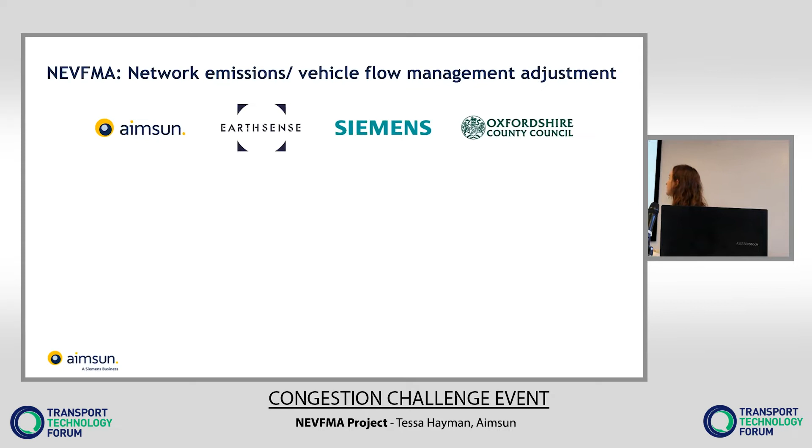So what does NEVFMA stand for? It stands for Network Emissions Vehicle Flow Management Adjustment. The project was building a real-time model of Oxfordshire County, which then combined with EarthSense's Zephyr model and gives real-time air quality data from our traffic model. We then use that air quality data as well as our traffic outputs on congestion to identify where there might be problems and then come up with some solutions in real time which can be tested.

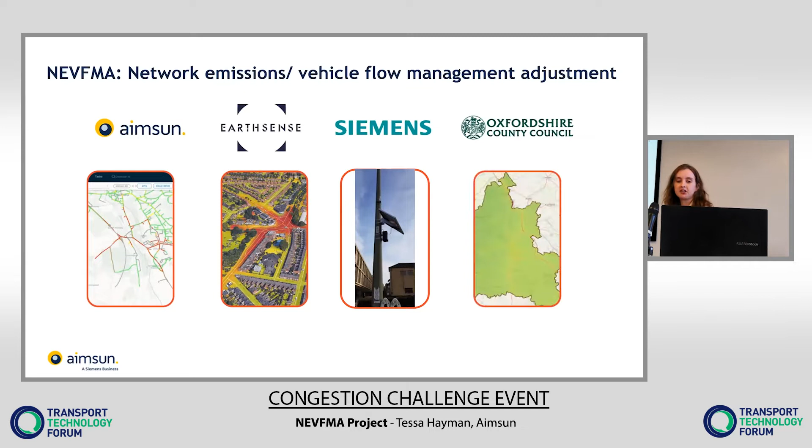We also had Siemens on the project. They were doing some stuff with AI and signals, but we're not going to talk about that in this presentation. And we also had Oxfordshire.

Our objective in doing this was to try and mitigate the air quality problems across Oxfordshire from the road transport. And what we wanted to do was see if a real-time model could both improve congestion and maybe the air quality problems around that. And in doing that, we wanted to look at using existing council infrastructure to build this and try and aim to reduce the tailpipe emissions.

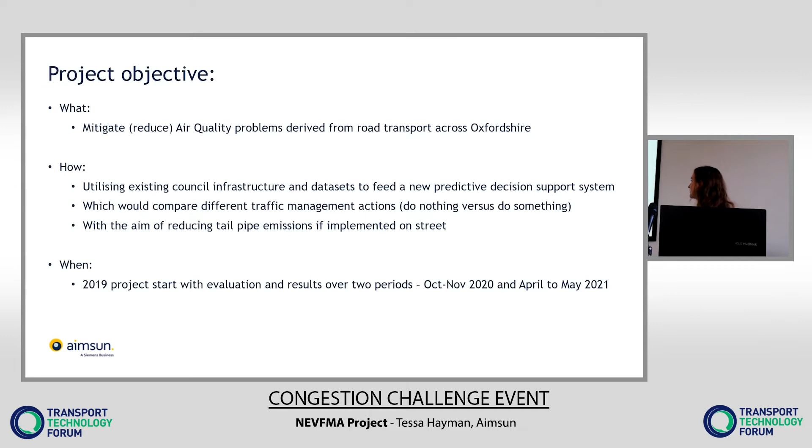So Aimsun Live, which is our product, is a real-time traffic model which can predict near future traffic conditions. So it can give predictions in 15 minutes, 30 minutes, 60 minutes time. And in real time, it can also test and compare response plans. So if you give it a set of response plans, it can check and give you KPIs, not just on traffic, but also on that air quality.

So we have that real-time emissions model predicting the near future air quality, but it will also test with those response plans what the air quality might be like with those different response plans.

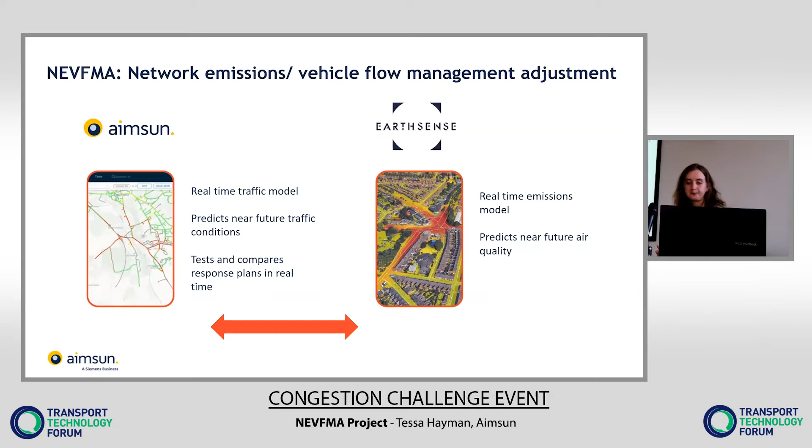To enable this, we have three different parts of the product: monitor, predict, decision support. To monitor the network, you have your real-time traffic model, which is 24/7 of the whole of Oxfordshire County. And that means that you can look to see if something is happening. Is there some congestion? Are things different to normal?

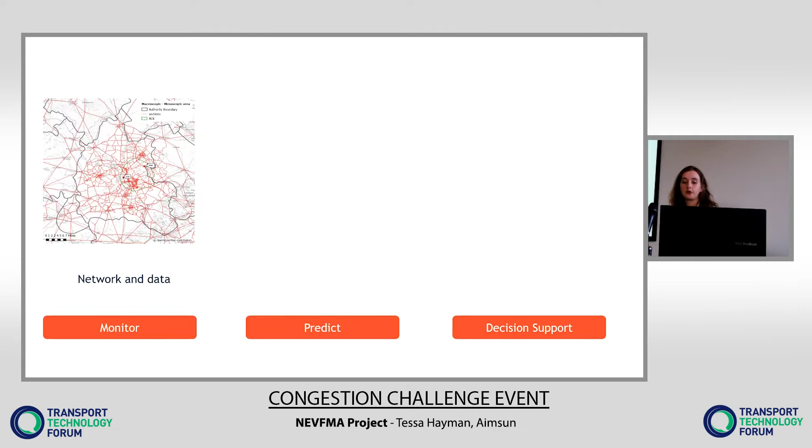To try and then predict, we have traffic patterns and profiles. So we can give analytic and simulation-based predictions. They use the historic and real-time data to come up with this. So it uses some clustering to try and predict what will happen based on what we think is currently happening and what has happened in the past when this has happened in the future.

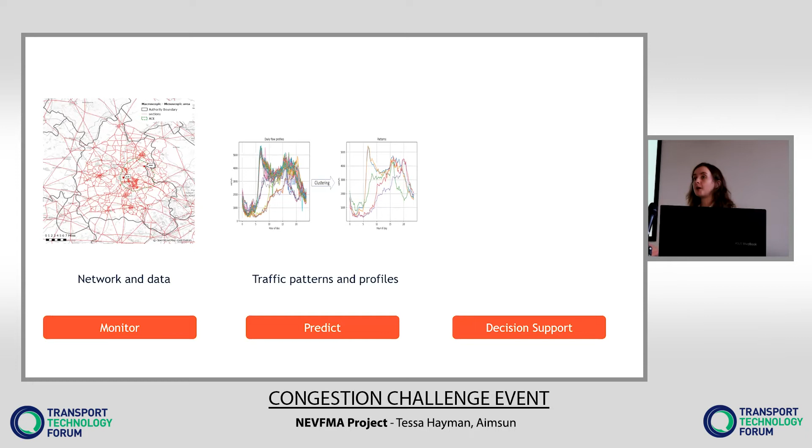If you then notice that either there is a problem now when you're monitoring it, or there might be a problem in the near future, you can then use our decision support. So we can give out those tailpipe emissions and give out some KPIs which the user gives us to tell us what they care about.

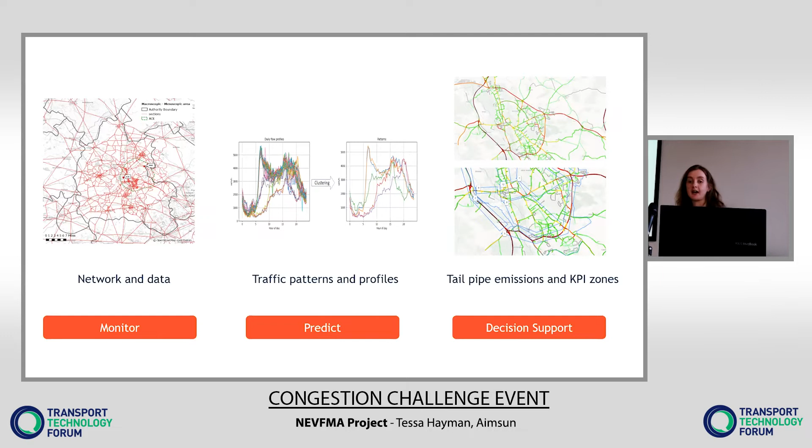To build the NEVFMA product, we had a 24/7 model that was based on 2019-20 data with 10 different profile types. That's different kinds of traffic patterns, not different vehicle types. You then have the ITS system. So we had a load of real-time detectors, which are all feeding into our model. And then we've got the air quality estimates as well for CO2 and NOx coming from EarthSense.

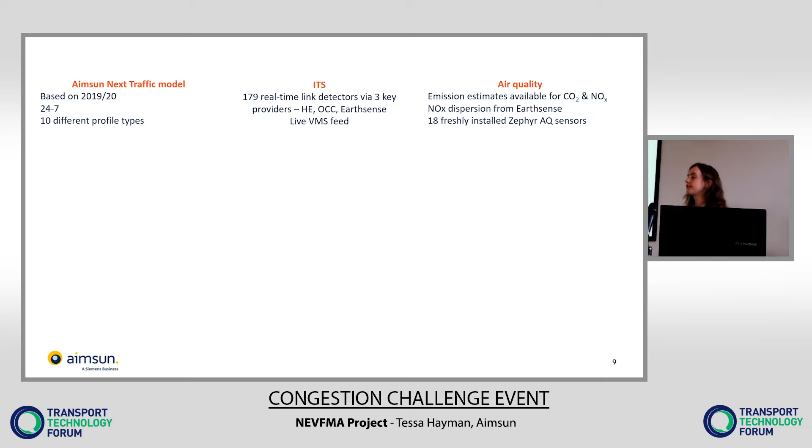And all of that comes together to give our real-time decision support system. You have the KPI outputs, just really easy for a user to see. These are all in an online system. And you also have map-based outputs and zonal outputs, as well as the air quality.

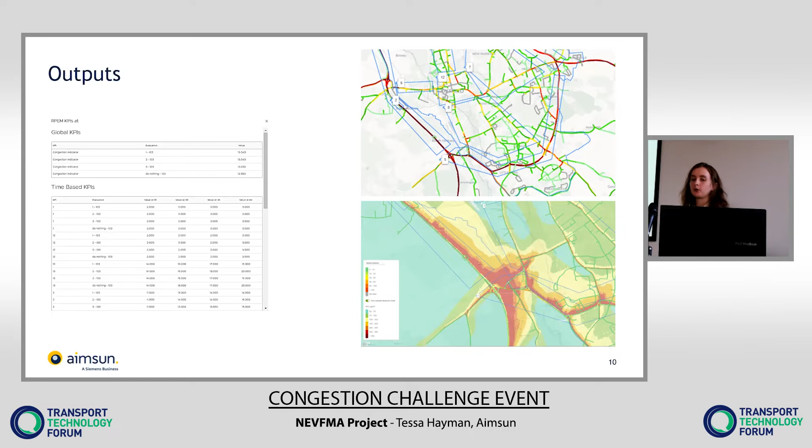Now, I am going to be another person who talks about COVID-19. There is a nice different graph. It is something that came out of this project, is that in real time, we could also see what was happening in Oxfordshire with the traffic.

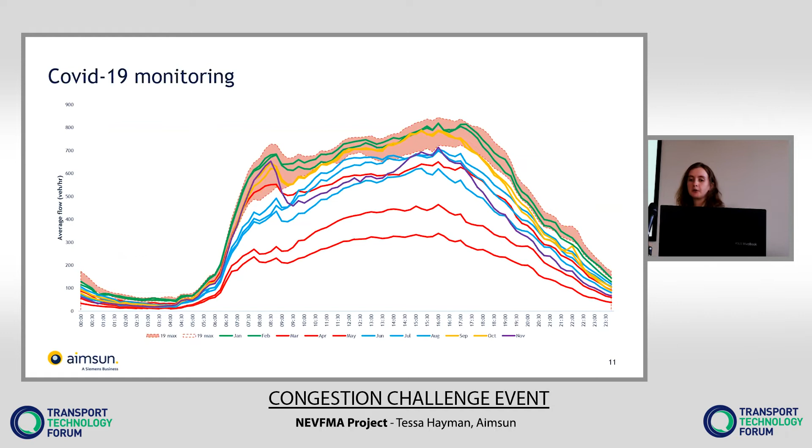As far as I know, I think that some of this was used in Oxfordshire to try and help their traffic planning as well as their understanding of the pandemic. And what we saw was some slightly aside piece of information, but we could actually see the political changes that were happening, and we saw the traffic reflecting those political changes as well as different day types.

So in the spring bank holidays, suddenly there was more traffic and then it might come back down. And that, I think, is again a slight aside, that this could be used for getting more understanding of different reasons for travel. You can start to isolate leisure from essential traffic. So even at its worst, 30% of traffic was essential during the pandemic, and you just can't get rid of it.

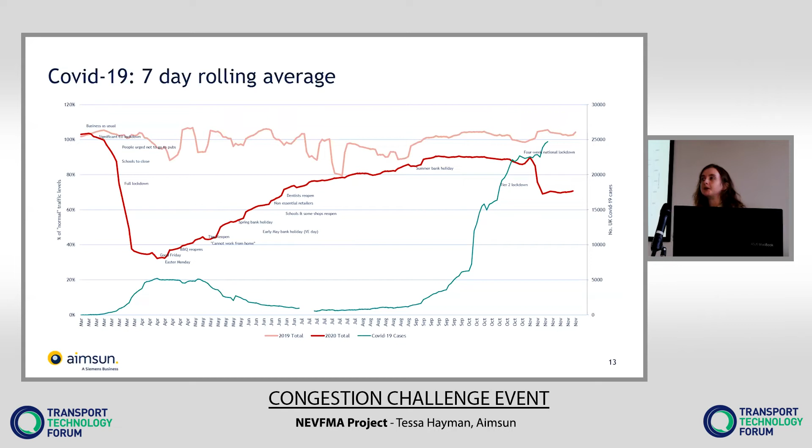And you might say that the remaining 10% are those working from home, and the people that we generally think, oh, the commute, are people going to office. But if only 10% of the people are working from home, perhaps our traffic management needs to change. Anyway, slight aside. Other things that we noticed were that every single day was different, even during the pandemic.

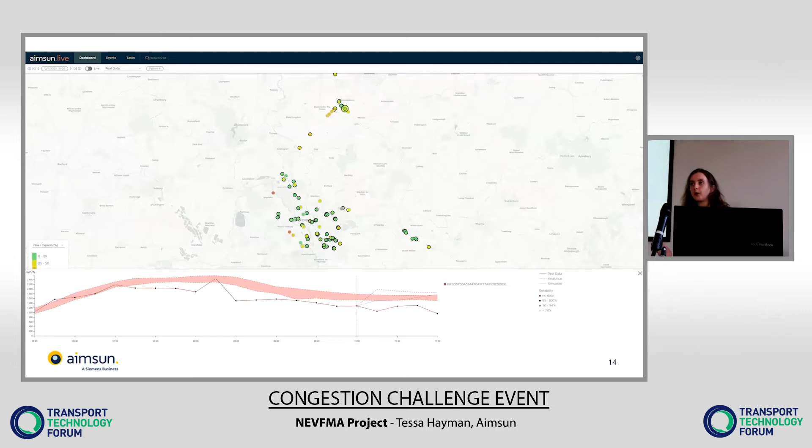Things are fluctuating and not in a completely predictable way. It's not like every Monday is the same Monday. So the way that we work it out is we don't have a normal Monday.

Instead, what we do is we analyze the historic data first, and then we identify the common patterns. It might be the case that pattern 1 or pattern 8 is a normal Monday, but it might be a normal Tuesday. We don't really know.

But then what we do in real time is we identify what the current pattern is, and we then provide analytical and simulated predictions based on that. And that current data then becomes historic to improve those patterns over time to get more understanding of what's happening. You can also build an alert system that says, okay, what's happening now is not what's usually happening on this pattern, or usually on a Monday, and those alerts can be sent out.

And then this slide has already been covered previously, the wonders of real-time simulation. But there are some other additional advantages. One is you can get a wider coverage.

So usually you can only get coverage where your detectors are. But if you start to build simulation in, you might be able to give predictions of where there aren't any detectors. You can also start to look at non-recurrent events and identify non-recurrent events.

Thirdly, it starts to allow you to emulate signals. So one of our strengths in Aimsun Live is we have some links to emulators, such as SCOOT and SCATSIM, which means we can emulate some real-time signals as long as the emulator is speedy enough. So as long as that's done, we can then start to put that in, and that allows you to test response plans in real time and make sure they are put out.

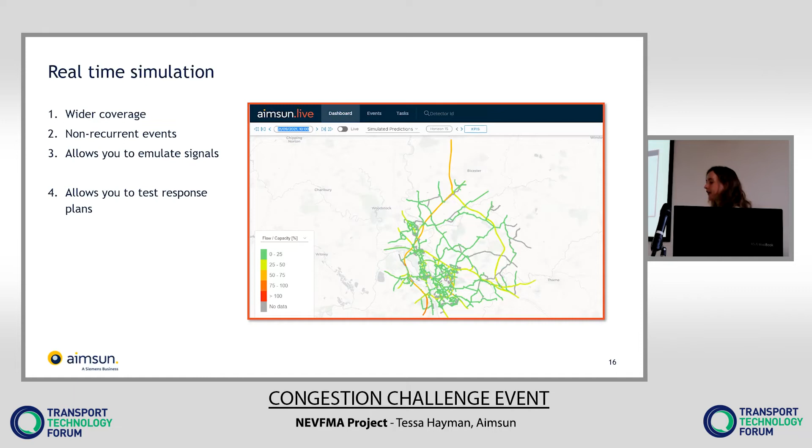So I'm just going to go through some case studies. And we were talking about some roadworks, and luckily I have a roadworks case study.

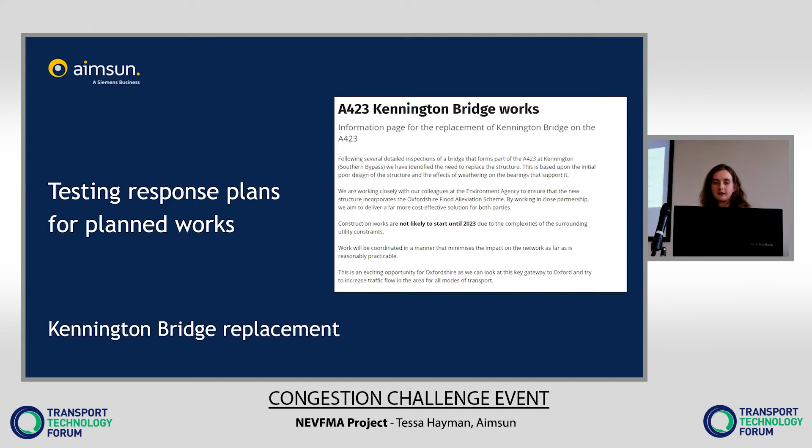One of our ideas for this kind of use case is not just real-time unplanned things, but you might have planned works. For instance, the A423 Kennington Bridge, that is at the south of Oxford on the Ring Road, and it is planned to be closed in, I think it was 2023, or maybe 2022, and it requires full closure to try and replace it.

So we thought about, okay, what could you do? If you do nothing, then within 60 minutes of this happening, you'll get severe congestion across the south of Oxford. We tested invoking a traffic management plan, which is just a simple contraflow system, and we saw that the effects were mitigated, although you do have some density increases across the network.

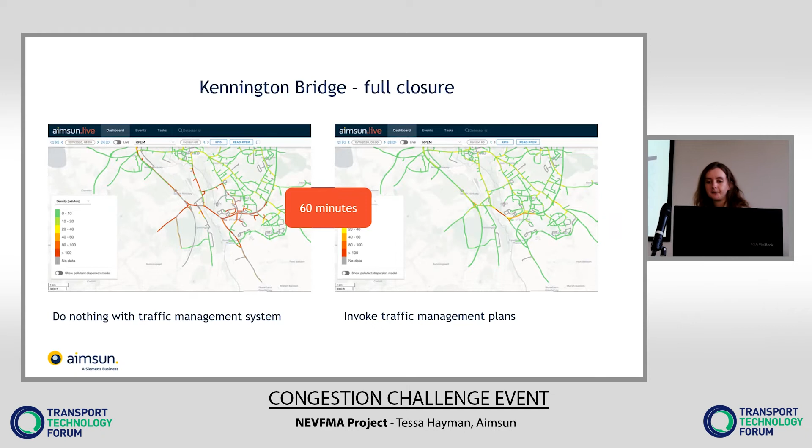And this is important because with air quality, you can see that over the hour, this spreads into the residential areas, which is where the effects of nitrous oxides are most apparent.

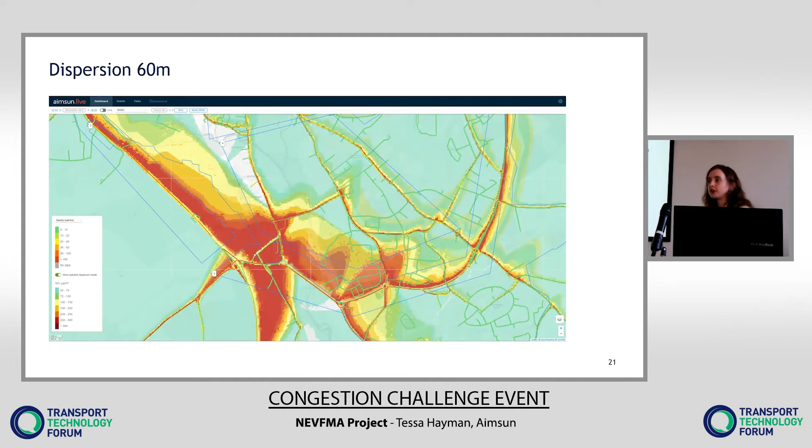And this is a planned work, so you can do this offline in a normal traffic plan, but the advantage of doing it in our real-time system is that you can not just do it on a typical day, you can then start to test the effect on lots of different traffic patterns to make sure your plan works over everything that you think it might.

And then test the effect of traffic management on route choice. You can also test the air quality, which you might not get. And obviously air quality is much less predictable than traffic because the effects of wind and canyoning is just immense.

So what we can see is that by doing it in a real-time system, you can then take what is happening right now and check that your response plan or set of response plans is right for that day. So you might have a planned work, but you might want to, before you put in the traffic management, check that you have the correct response plan for that work.

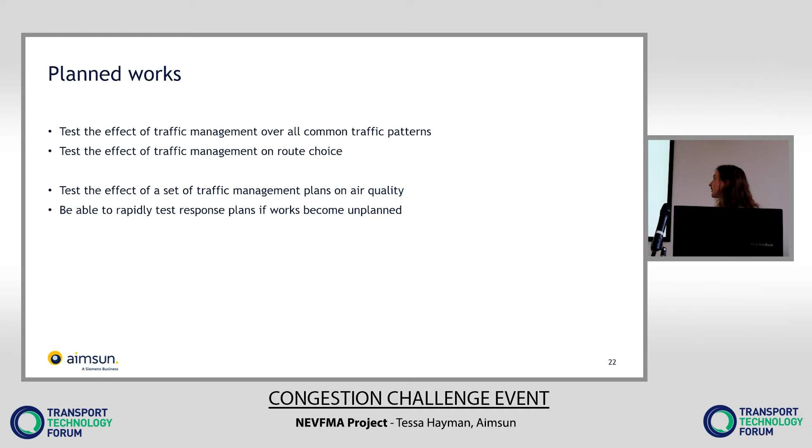And then perhaps that bridge might need to have some emergency works on it. You can then rapidly test different response plans in that case.

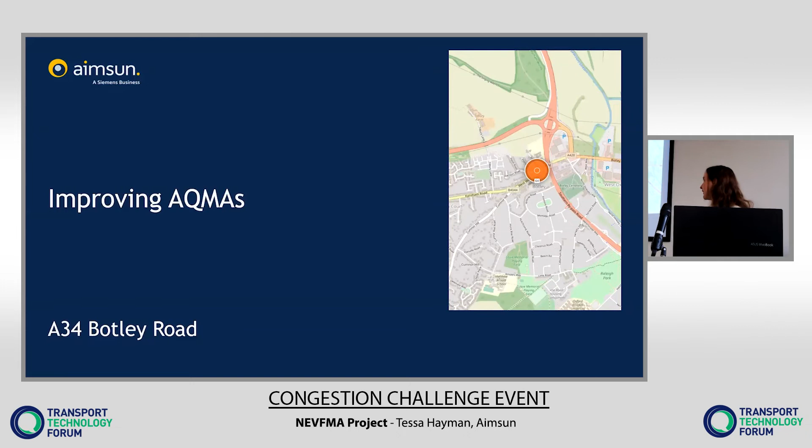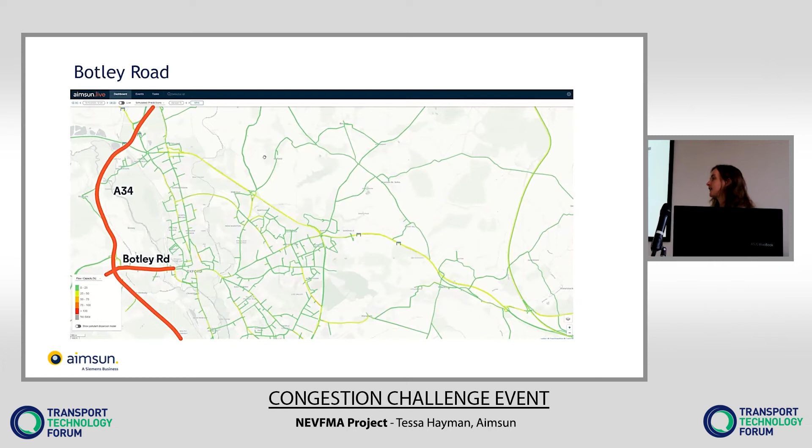The other case study we're going to look at is improving AQMAs, air quality management areas. So we're going to look at Botley Road, which for those of you who know Oxford is one of the major thoroughfares into Oxford. It has a park and ride and is the entry to the station, and it's well known for having lots of congestion and has had historic problems with nitrous oxides.

So what we did is we had a look at this road, and we found that the modelled nitrous oxide exceeded legal thresholds on 57% of the evaluated days.

We then put in some response plans, which we designed, and those reduced modelled nitrous oxides on 60% of the days evaluated, with an average improvement of 5% seen. And those were just with some relatively simple response plans.

More bespoke response plans could be created by those in the know. And then what we saw was that actually in our second evaluation period, as the traffic returned to more normal levels, the improvement from these response plans was much greater, and the maximum benefit doubled from 20 to 40%.

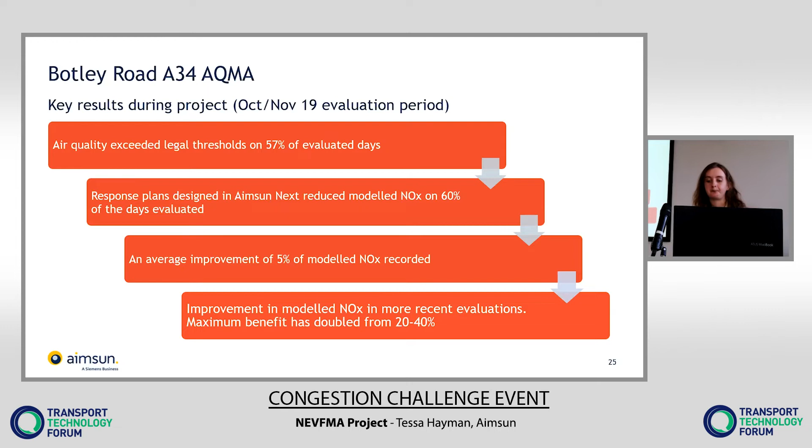So in summary, as I think we've all heard enough today, typical days aren't necessarily typical. Our system learns and adjusts the longer it is deployed. So instead of having one day and just relying on that, we can start to learn and see how things adapt and make our predictions better as we deploy it longer, using artificial intelligence systems as well as simulation.

We also can see that real-time systems can aid in traffic management for both planned and unplanned events. And there are lots of new things that we can add in there, and we hope to get some more partnerships and projects out there.